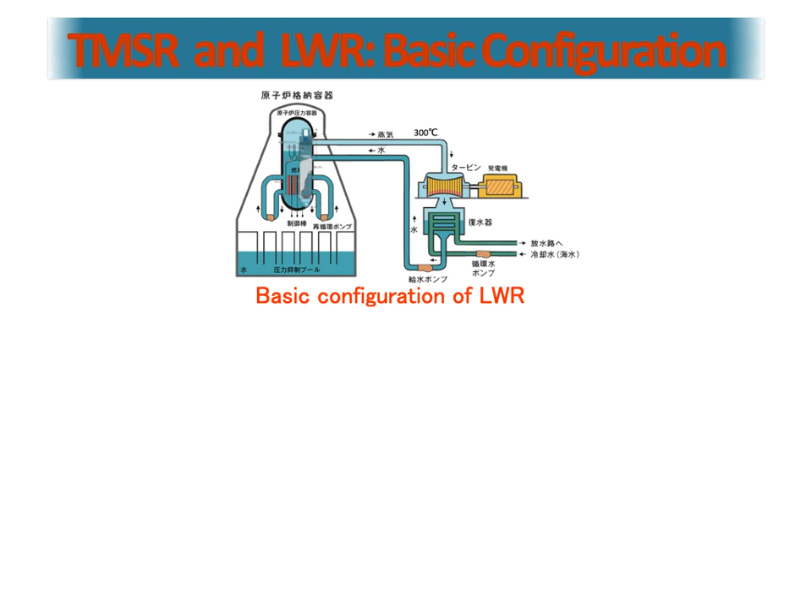or LWR. Light water reactors use solid nuclear fuel. Fuel rods are filled with uranium pellets and are bundled together to form fuel assemblies, which are stored within the reactor pressure vessel. Water is used as both coolant and moderator. Water is also turned into vapor, boiled within the reactor at temperatures of about 300 degrees, which turns a turbine to generate electricity.

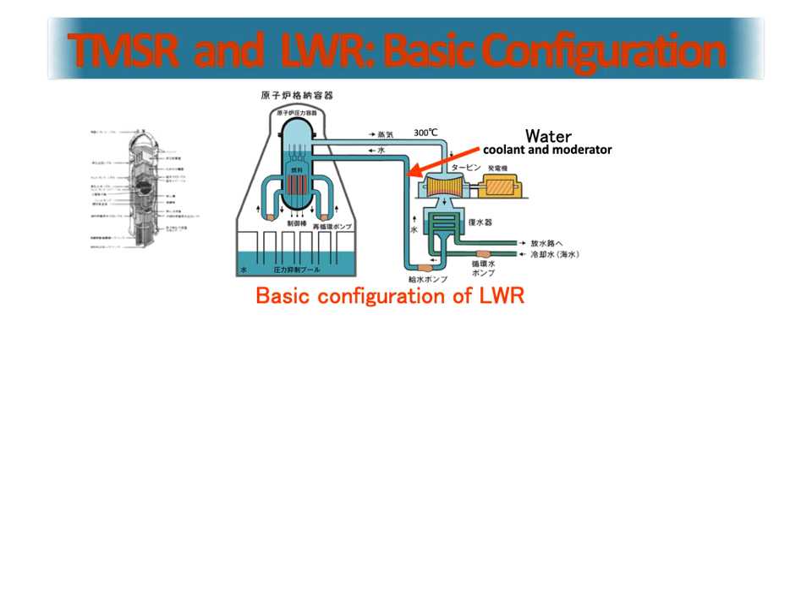Because the fission products, or FP, that absorb the neutrons are contained within the fuel rods, fission products increase in quantity as more neutrons are absorbed. Light water reactors require high concentrations of uranium to increase the reactivity inside the reactor during the early stages of operation, and excess neutrons are absorbed by control rods. The reactor is designed to maintain a proper critical state at all times by adjusting neutron absorption as FP and the amount of neutrons increase.

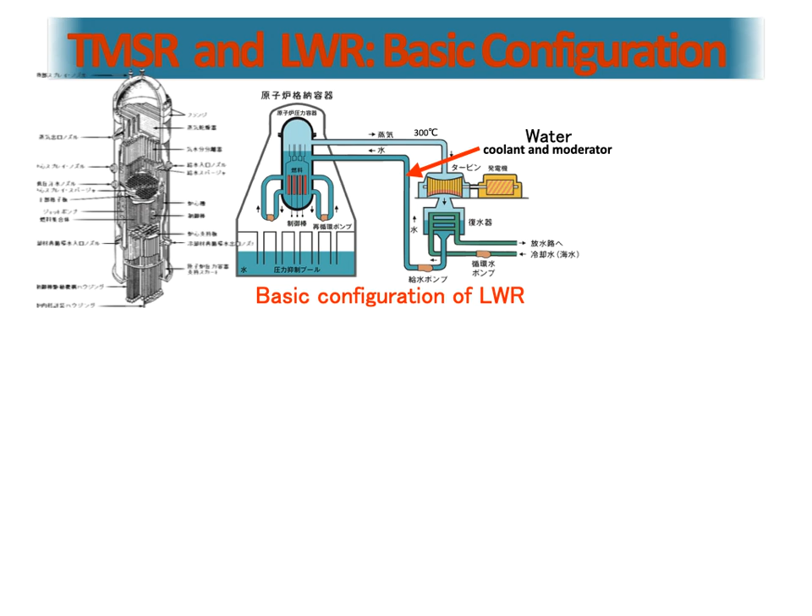This means that it is necessary to maintain delicate control of the reaction, which means that the interior of the reactor pressure vessel needs to have a complex structure, with various devices including many different types of control rod.

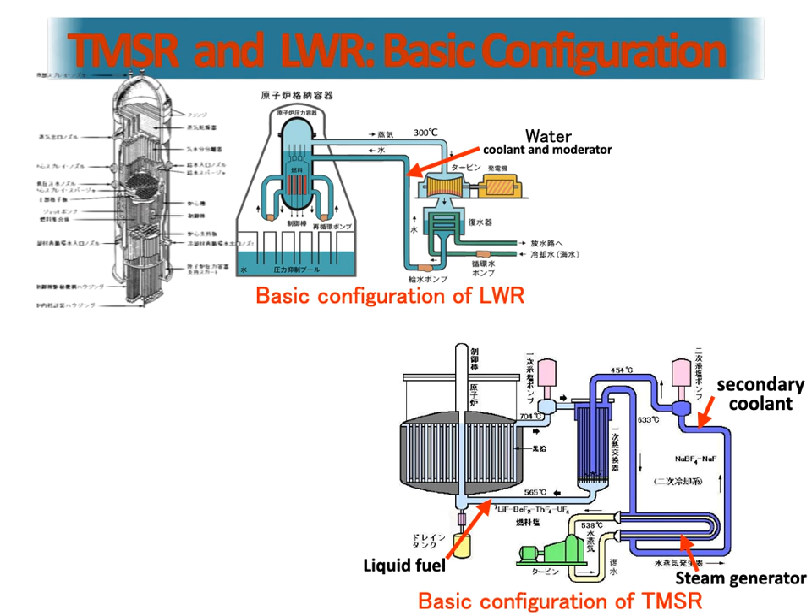In contrast to this, thorium molten salt reactors use a liquid fuel made from molten salt mixed with thorium and uranium fluoride. The molten salt in the reactor core transfers heat to the secondary coolant in the primary heat exchanger. The secondary coolant then generates steam in the steam generator. This steam turns a turbine to generate electricity.

The core inside the reactor vessel uses graphite as a moderator instead of water. Because TMSRs are liquid fuel reactors, there is no need for complex control using control rods. The reactor vessel has a simple structure consisting of only the fuel salt, a few control rods, and the graphite moderator and reflector.

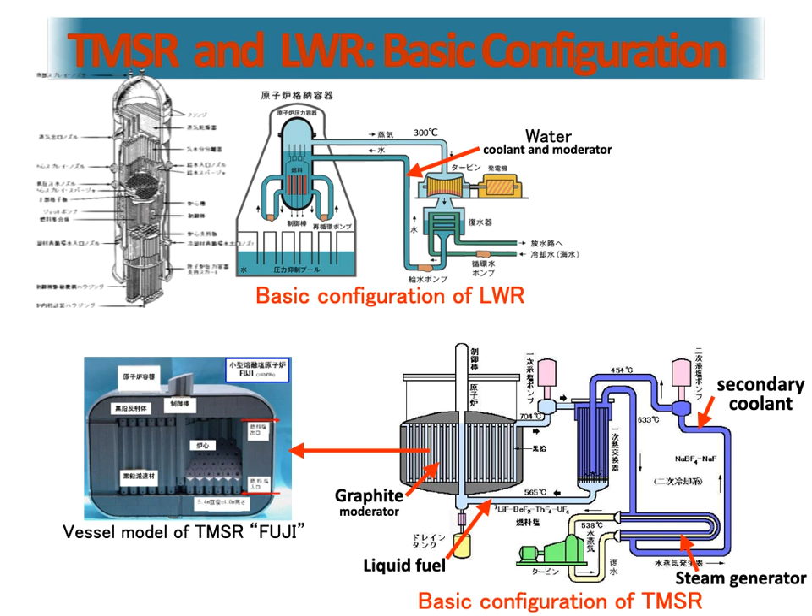Light water reactors and thorium molten salt reactors use different nuclear fuels and have slightly different nuclear reactions. In light water reactors, slower thermal neutrons are more likely to cause nuclear fission in uranium than fast neutrons, so the speed of the neutrons is decreased using water as a moderator.

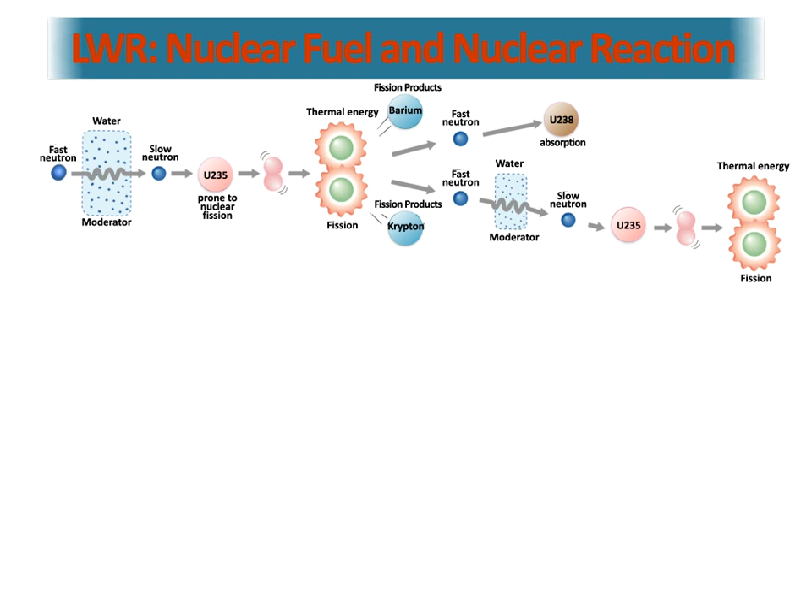Nuclear fission occurs when neutrons collide with uranium molecules, resulting in fission products, or FP, and usually two more neutrons. One of these two neutrons will then collide with a new uranium molecule, once again giving rise to nuclear fission and continuing the chain reaction.

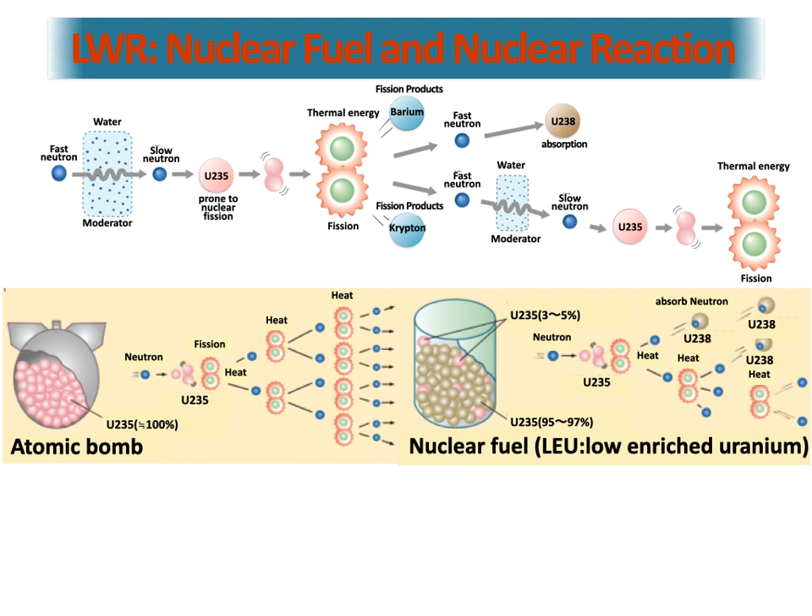With nuclear bombs, the other neutron also causes a chain reaction, which expands explosively and instantly generates an enormous amount of energy. Light water reactors suppress this explosive chain reaction by mixing into the fuel large quantities of uranium-238, which absorbs the excess neutrons and thereby transforms into plutonium-239.

Combustion with the solid fuel used in light water reactors is uneven. As such, the reactor must be shut down around once per year in order to change the position of the fuel assembly and ensure homogeneous combustion.

Finally, gaseous fission products such as krypton and xenon get trapped and build up within the cladding of the fuel rods, so it is necessary to replace the fuel rods every 3 years in order to prevent internal pressure from damaging the rods.

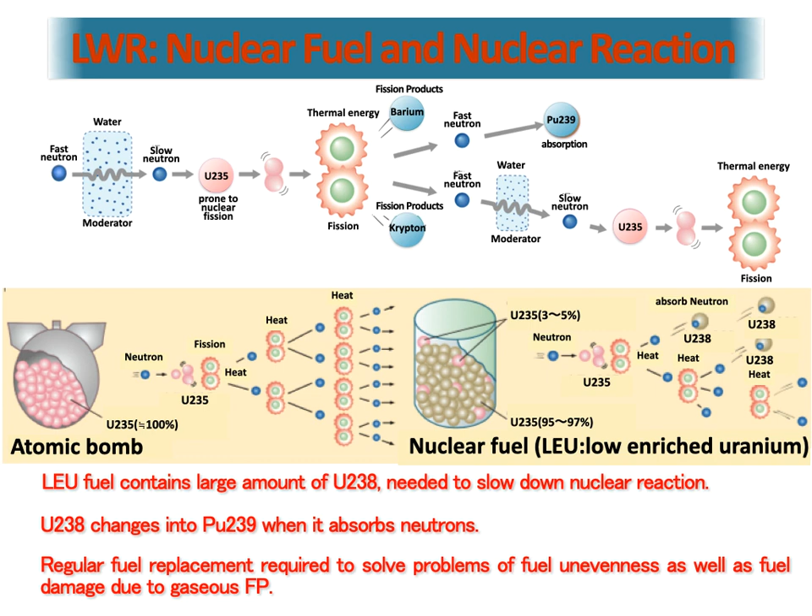Thorium molten salt reactors use nearly the exact same nuclear reaction as light water reactors, but use thorium instead of uranium-238 to absorb excess neutrons. Because there is no uranium-238, plutonium is almost never produced.

The thorium that absorbs the excess neutrons has a half-life of 27 days and transforms into the same uranium-233 that is used as a nuclear fuel. In this way, nuclear fuel is replenished and the reactor becomes almost self-sufficient.

Uneven combustion does not occur because the liquid fuel salt used in thorium molten salt reactors can be constantly circulated and stirred in order to maintain a uniform state. Moreover, gaseous fission products are constantly removed, so there is no need to replace the fuel.

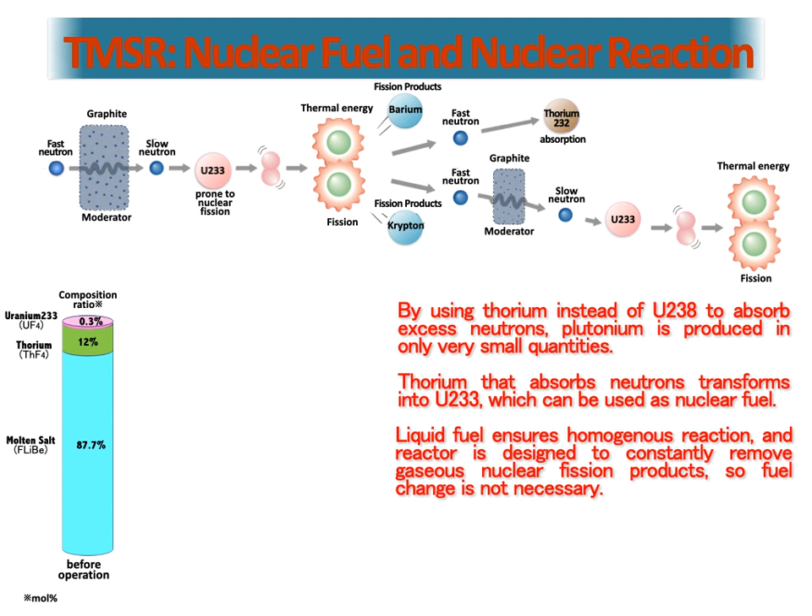When loaded, the fuel-salt composition ratio is only 0.3% uranium, 12% thorium, with the remainder being molten salt. Even after the reactor becomes operational, the amount of uranium is self-sufficient and almost doesn't change. FP is produced as thorium is consumed.

The efficiency of the reaction decreases because of this FP. Because of this, chemical treatment is required once every few years to remove FP and replenish the thorium. This returns the reactor to almost the same composition ratio as when the fuel was originally loaded. In the end, there is only a very small quantity of FP to be disposed of, and very little waste from spent nuclear fuel.

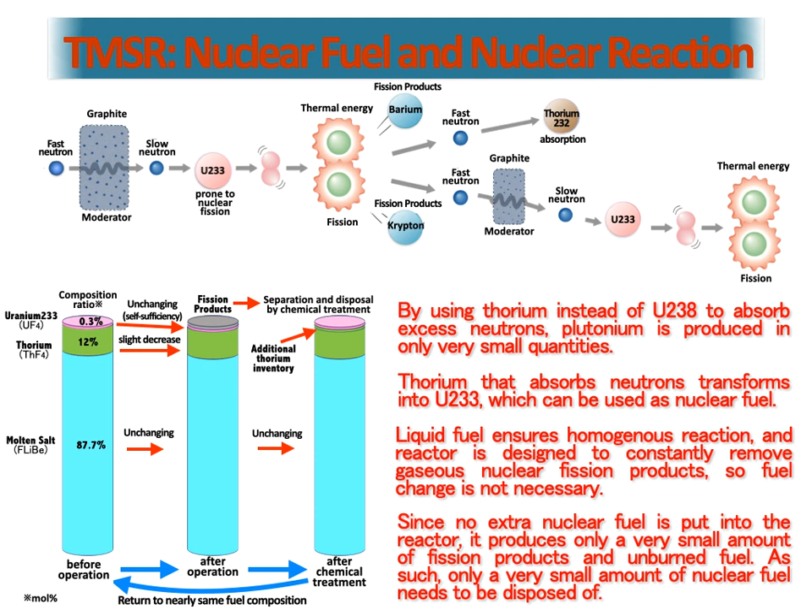Because light water reactors use water for cooling, the pressure inside the reactor vessel can be as high as 70 atmospheres. This means that the possibility of a steam explosion cannot be ruled out. Thorium molten salt reactors, by contrast, operate at normal pressure, so there is no risk of accidents associated with high pressure.

LWR also comes with the risk of explosion due to hydrogen generated in thermochemical reactions between the fuel rod cladding material and water. This occurred in the Fukushima nuclear accident. With TMSR, however, such thermochemical reactions do not occur.

With LWR, there is also the risk of reactor core meltdown if problems occur during the cooling of the decay heat after reactor shutdown. This also occurred in the Fukushima accident. With TMSR, however, the reactor core is already molten, so core meltdown does not occur. Even if there were an abnormal temperature rise, there would be no serious accident, as the properties of the liquid fuel would remain the same.

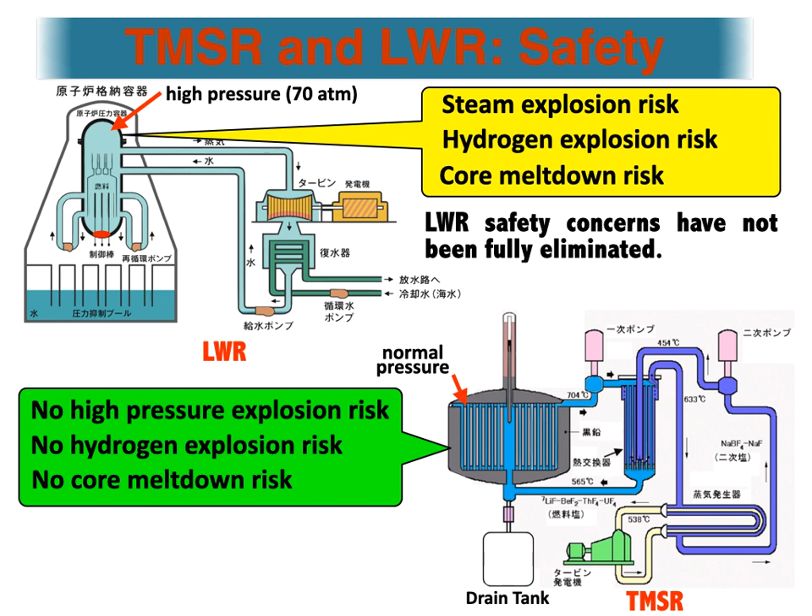After the nuclear accident at Fukushima, safer light water reactors, such as SMR and next-generation light water reactors, have been developed. However, the above safety concerns have not been entirely eliminated.

With TMSR, by contrast, even if something does go wrong and the control rods are unable to shut down the reactor, it is possible to simply discharge the fuel salt into a drain tank directly below the reactor. This will shut down the reactor, and re-criticality does not occur in the drain tank because there is no moderator present.

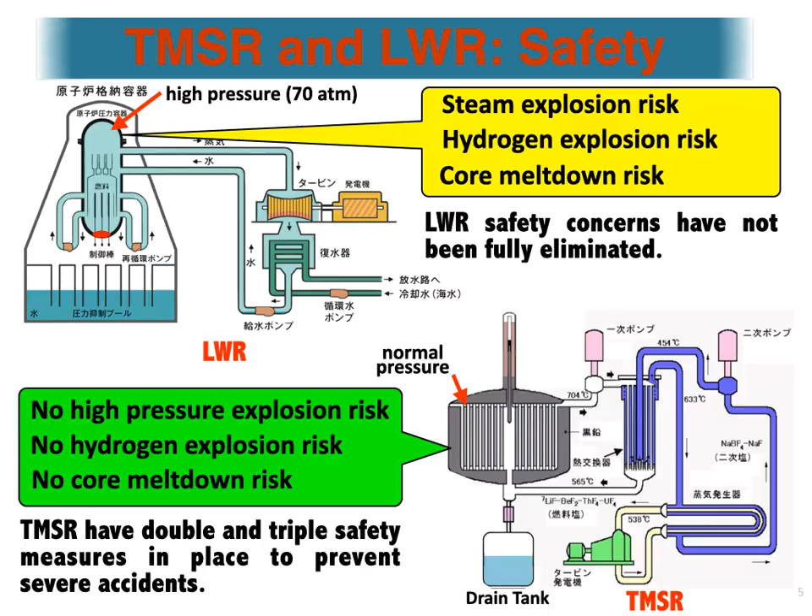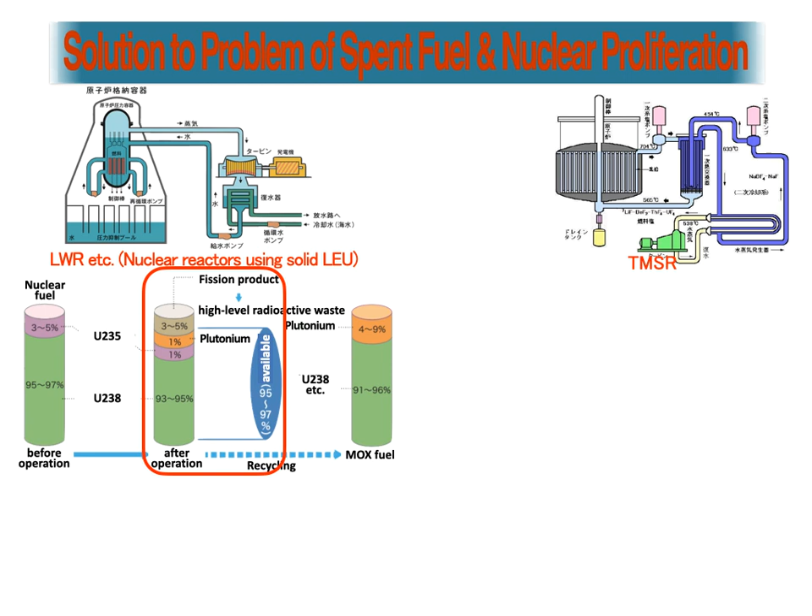In short, thorium molten salt reactors have double and triple safety measures in place, which makes it impossible for severe accidents to occur. In the spent nuclear fuel generated from nuclear reactors which use solid low-enriched uranium, such as LWR, there is still about 1% of fissile uranium-235 and plutonium-239, and a large amount of uranium-238, about 95%. These must be reprocessed and reused as MOX fuel or sent away for final disposal.

If the plutonium produced during the operation of a light water reactor is kept and not reused as nuclear fuel, there is the concern that this plutonium could be used for nuclear weapons. This raises the issue of nuclear weapons proliferation.

In contrast to this, with TMSR, chemical treatment is performed once every few years to remove fission products from the fuel salt. However, because these reactors operate continuously for long periods of time and use up the nuclear fuel, there will never be a large buildup of spent nuclear fuel.

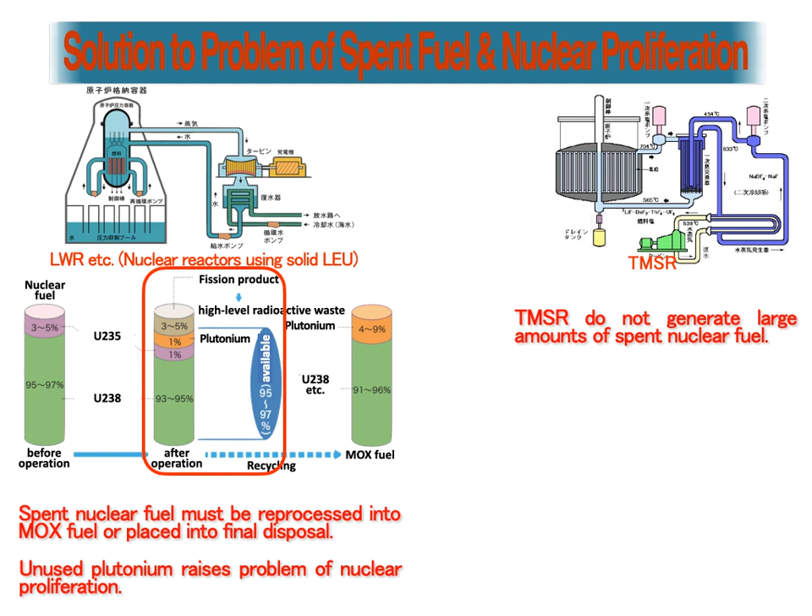Moreover, with TMSR, uranium-238 is not used as nuclear fuel, so in principle almost no transuranium elements are produced, including plutonium. Because of this, the amount of high-level nuclear waste produced by TMSR is extremely small.

Finally, TMSR can use plutonium as an alternative fuel to uranium-233. This means that the plutonium produced by existing nuclear power plants can also be consumed in a way that is vastly more efficient than burning MOX fuel in plu-thermal reactors.

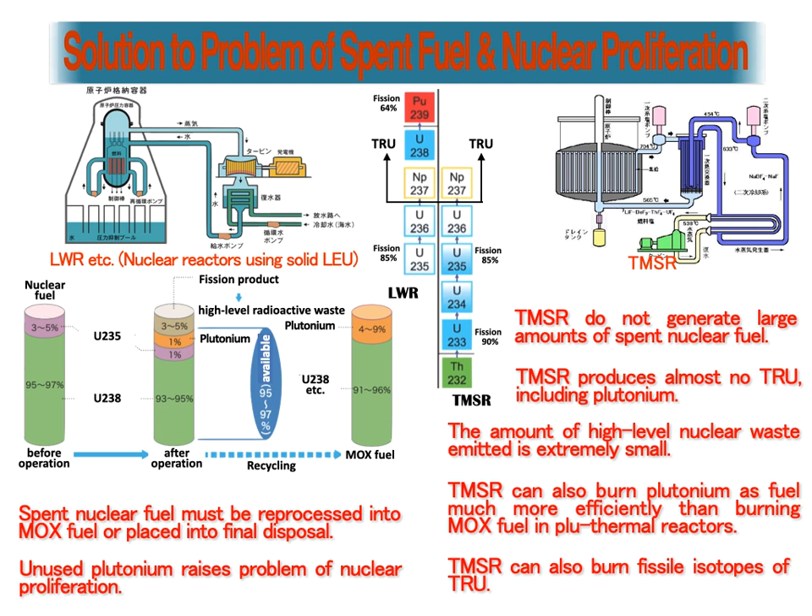TMSR can also use as fuel large volumes of fissile isotopes of transuranic elements. So the development of TMSR will enable humanity to solve the problem of spent nuclear fuel, nuclear waste, and also nuclear proliferation. What is the cost of power generation in TMSR compared to other methods of power generation?

Based on the conceptual design of the Mini Fuji 2 25-megawatt reactor, the estimated cost of power generation would be around 6 Japanese yen per kilowatt hour. For the Fuji 200-megawatt reactor, the estimated cost would be around 5 Japanese yen per kilowatt hour. Even compared to the cheapest light water reactors, these costs are overwhelmingly low.

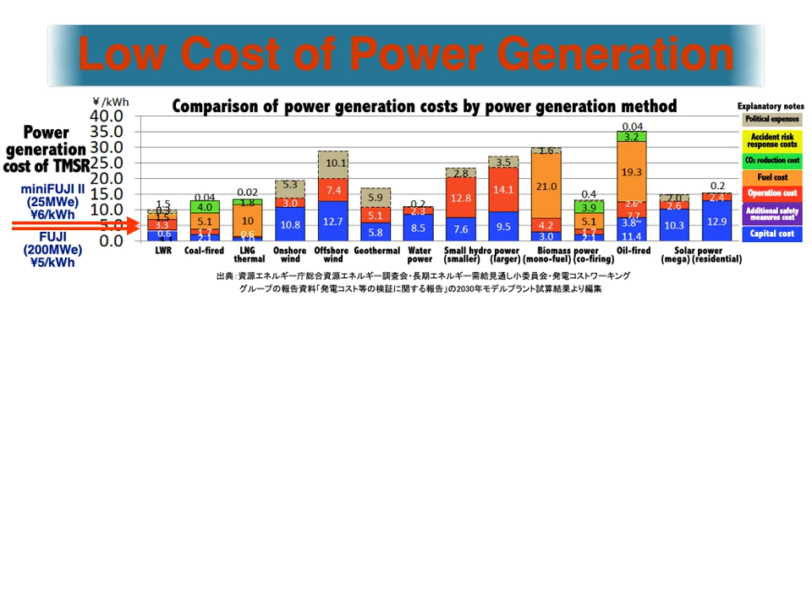Why are the costs of power generation so low with TMSR? The first reason has to do with fuel costs. TMSR uses low-cost thorium as nuclear fuel. Moreover, unlike light water reactors, TMSR does not leave any nuclear fuel unused, using the exact amount of nuclear fuel that is necessary. In addition, there is no need to process nuclear fuel into complex nuclear fuel assemblies, so fuel costs can be kept very low.

The second reason has to do with the costs of waste disposal. Since TMSR does not produce unburned spent nuclear fuel, they produce only about 1/1000th of the high-level nuclear waste compared to LWR. As such, the costs associated with reprocessing and waste disposal are very low.

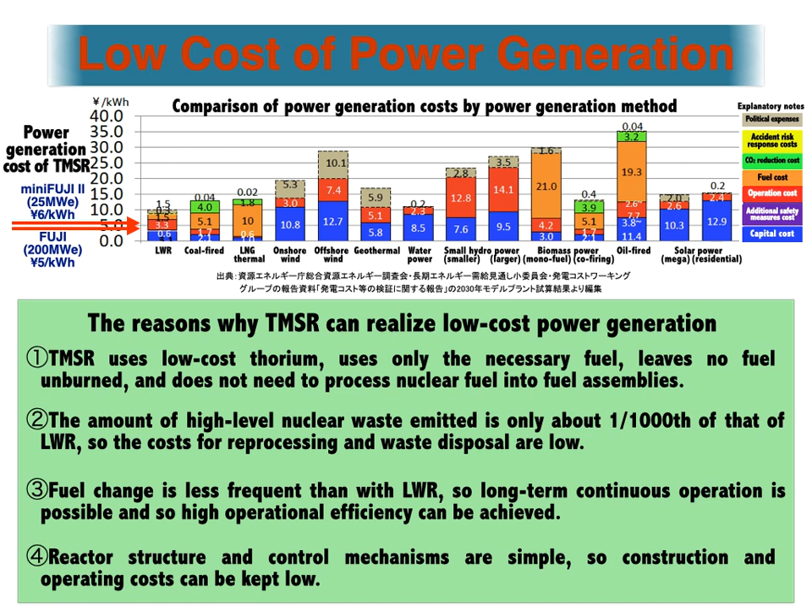The third reason is that TMSR does not need to change fuel as frequently as LWR, which means that they can operate continuously for long periods of time and achieve high rates of operational efficiency. The fourth reason is that the reactor's structure and control mechanisms are simple, which means that construction and operating costs can be kept down.

The amount of fuel necessary to operate a 1 million kilowatt power plant for 1 year depends on the type of fuel. For thermal power generation using fossil fuels, the amount of natural gas required is enormous, 950 kilotons. A light water nuclear reactor requires 21 tons of enriched uranium.

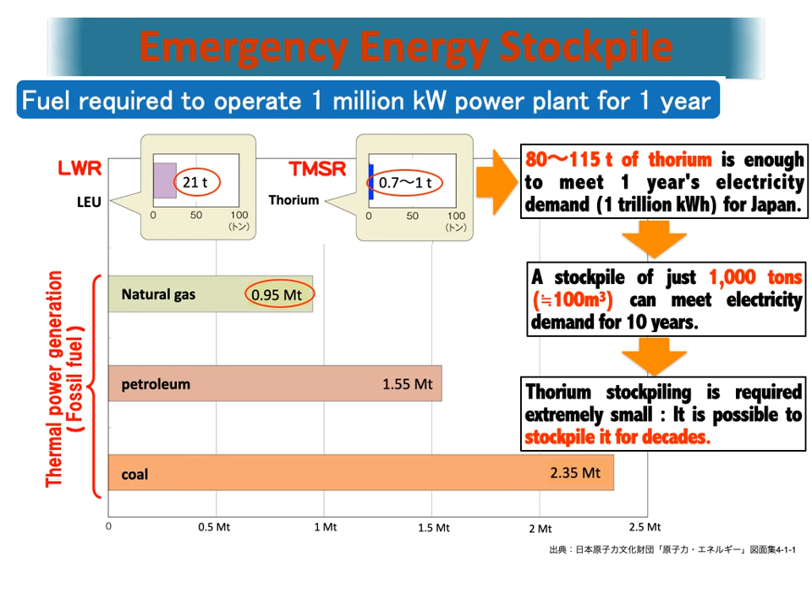With TMSR, by contrast, the same amount of energy can be produced using only 0.7 to 1 ton of thorium. As such, approximately 80 to 115 tons of thorium would be enough to meet Japan's electricity demands for 1 year, and a stockpile of just 1,000 tons, which would be about 100 cubic meters in volume, could meet 10 years of electricity demand. Furthermore, since the amount of thorium required per unit of electricity is so small, it is possible to stockpile it for decades.

In short, a successfully developed TMSR would mean no further need to worry about securing energy supplies, even if it becomes difficult to import fossil fuels in the event of an emergency.

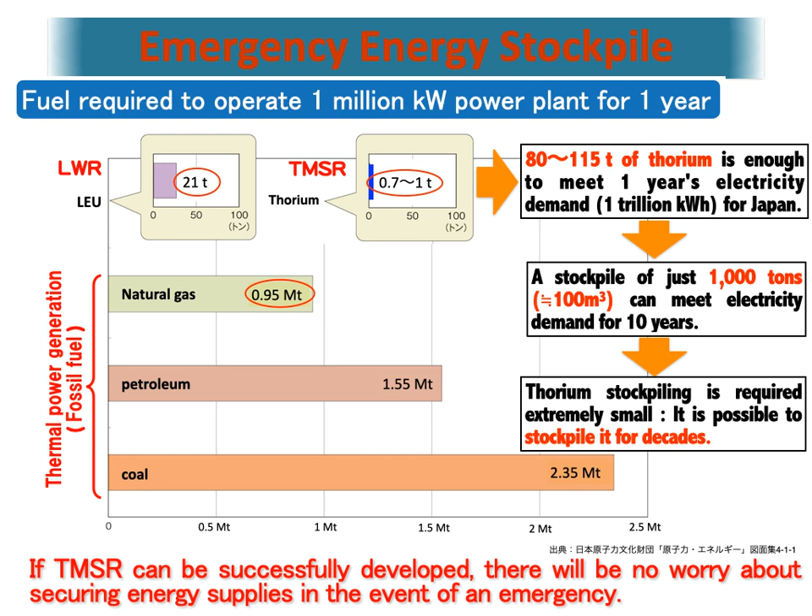TMSR can produce CO2-free hydrogen at a low cost of about 20 Japanese yen per cubic meter by using the heat and electricity generated by its power plant.

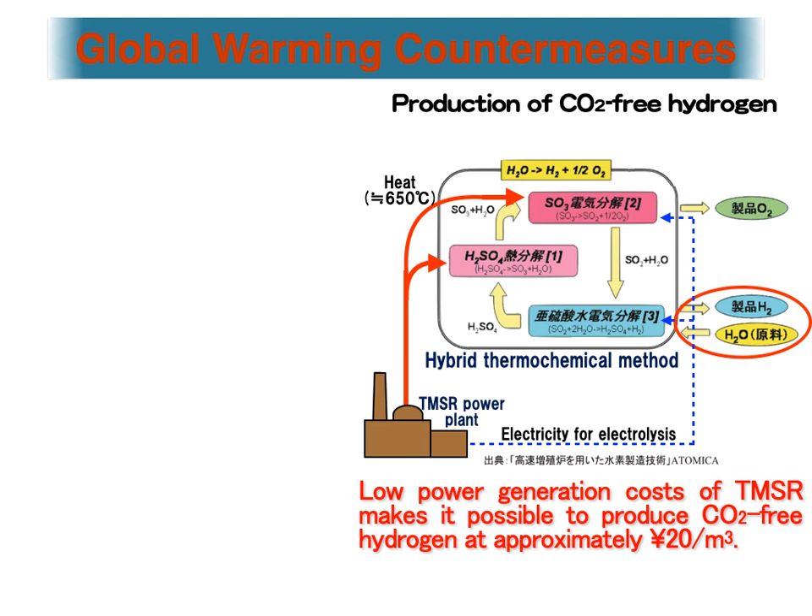In addition, renewable energy such as solar power often generates more power than demand during the day, but is unable to generate power during the night. At present, this gap between supply and demand is addressed at night by pumped storage power generation and by adjusting the output of thermal power generation. During the day, the excess power is often discarded.

With TMSR, output can be adjusted according to demand. So instead of closing the gap between supply and demand using thermal power plants that emit CO2, TMSR is perfectly suited to supply flexible power generation to supplement renewable energy sources.

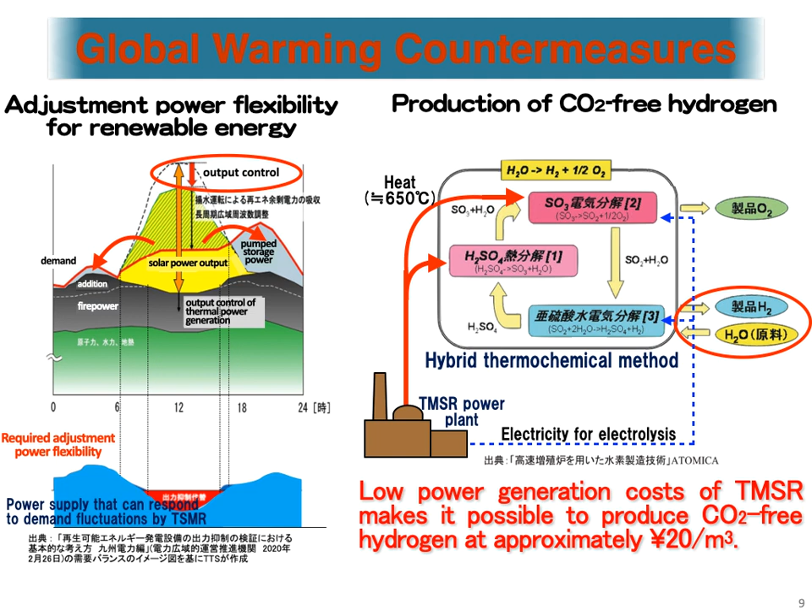Since the Fukushima nuclear disaster brought issues of safety to the fore, attention has been increasingly focused on the problems associated with nuclear power generation, such as spent nuclear fuel, nuclear waste, and the creation of plutonium.

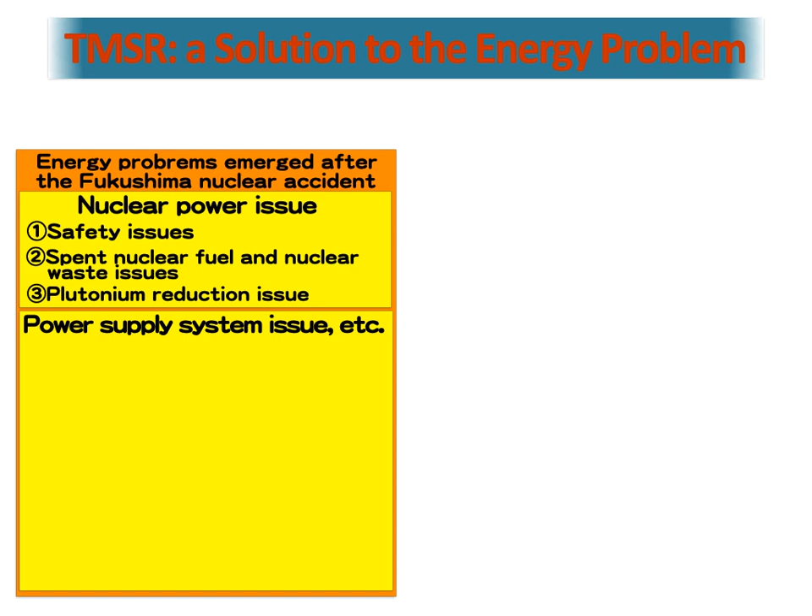In Japan, with the restart of nuclear power plants delayed due to increased safety measures, there is now an increased dependence on thermal power generation. This has led to a rise in the cost of electricity. Thermal power generation now accounts for the majority of the electricity supply.

However, thermal power emits large amounts of CO2 and also depends on fossil fuel imports, which means that there are concerns about the vulnerability of the energy supply in emergencies.

On the other hand, the power output of renewable energy sources often fluctuates depending on weather conditions, and renewable power plants also require large land area. So in countries where the weather conditions are not suitable or where the land area is small, there will be limits to the amount of electricity that such sources can supply.

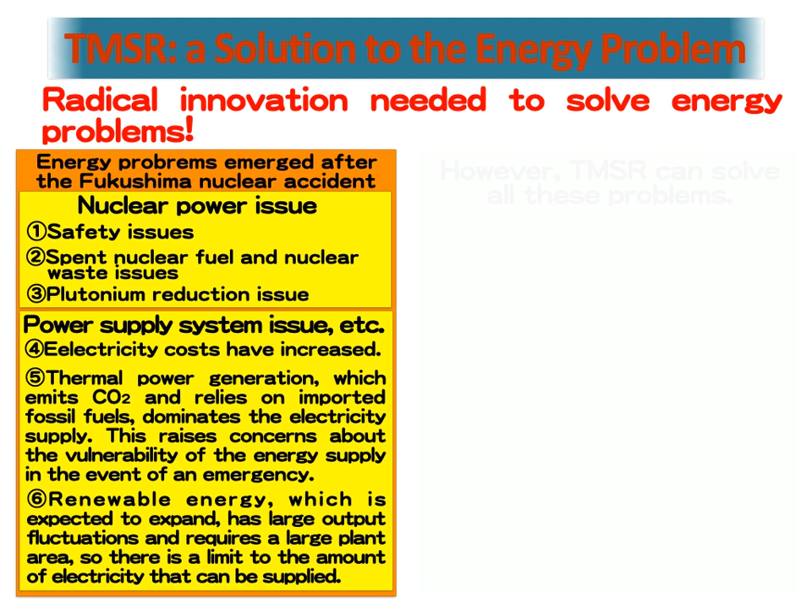The reality is that there is no solution to these problems, at least if the situation remains as is. However, the development of TMSR will fundamentally solve these energy problems.

With TMSR, serious accidents cannot occur, and high-level nuclear waste is reduced. Moreover, instead of creating plutonium, plutonium can be destroyed. TMSR, therefore, produces extremely cheap electricity, providing CO2-free power without relying on fossil fuels.

Moreover, by stockpiling thorium, energy can be secured to last for several decades into the future. The heat and electricity produced can also be used to produce low-cost CO2-free hydrogen, and TMSR can also supplement the fluctuations of renewable energy sources to produce a more stable electricity supply.

Finally, the land area required for a TMSR power plant is more compact than the area required for an LWR plant. As such, there will be fewer restrictions on location and no limit to the amount of power that can be supplied.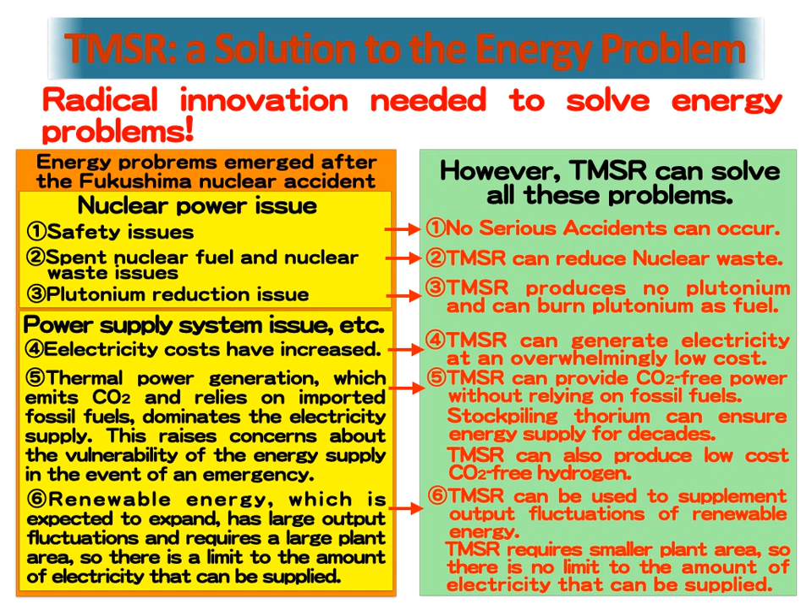Why, despite these incredible features, has nobody yet bothered to develop a thorium molten salt reactor?

In the United States, beginning in 1965, Oak Ridge National Laboratory operated MSRE, an experimental molten salt reactor, for 4 years without any serious accidents. In 1971, the conceptual design and basic technology was established for MSBR, a molten salt breeder reactor.

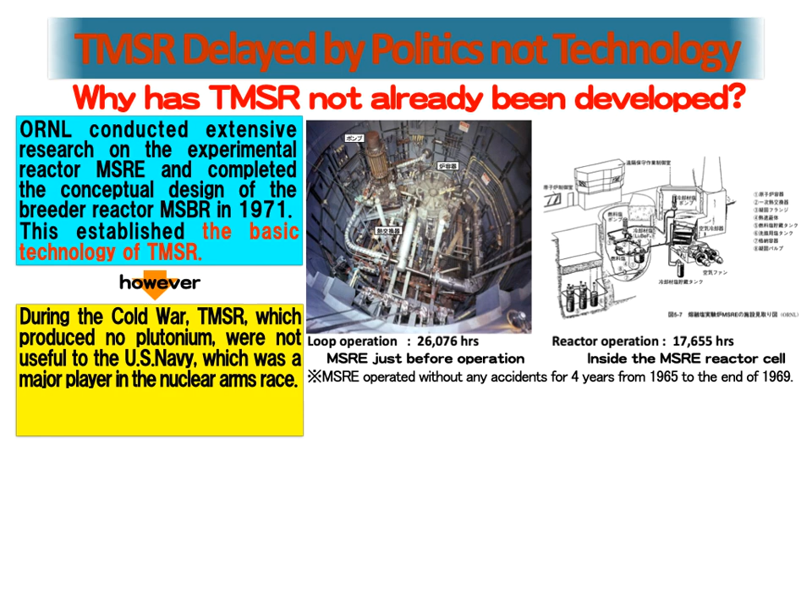However, during the Cold War between the United States and the Soviet Union, thorium molten salt reactors, which could not produce plutonium, were not considered useful by the US Navy, which was a major player in the nuclear arms race. As such, further development was blocked due to politics.

Now, however, times have changed, and this technology has been reconsidered. TMSR is now seen as a solution to our energy problems, and dozens of venture companies around the world are currently working hard to develop a commercially viable reactor by 2030.